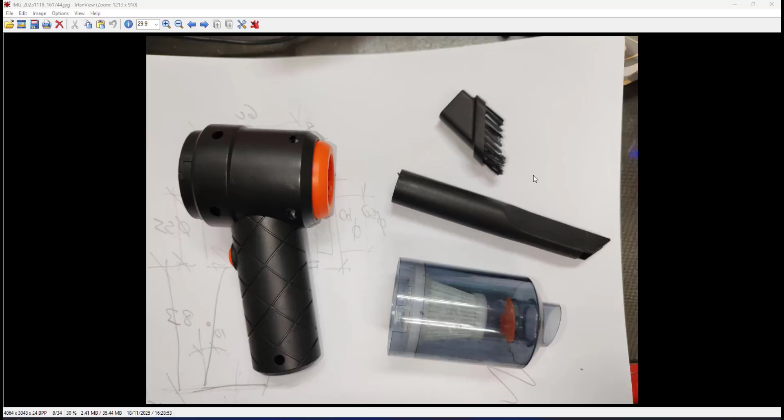This video is about how I will show you how to do this power button here. Actually, I don't have the close-up snapshot photo of this. We have a power button mounted, if you look at this image, it would be fitted here. So I will show you how we will do this orange power button in Solidworks. I will start part modeling.

A new part modeling, and the unit is set. Here in part modeling, you can also insert a different part in your new part modeling file. So to do the power button, I will insert the main body file. Since my main body file has the rear casing and the front casing, I'll use that main body file.

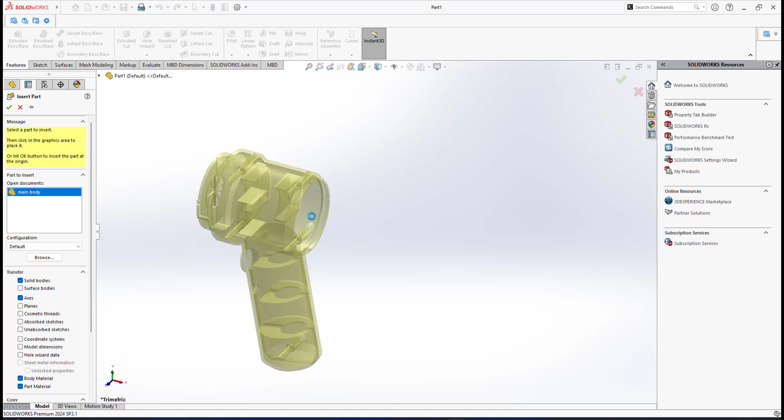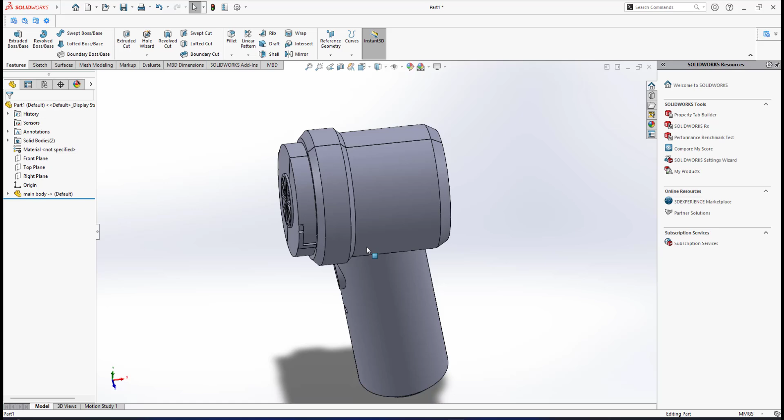I will not click on the screen. I simply click OK here, so it will put it at the screen at the base point, maybe at the origin point. So this is a new part modeling file. It's not affecting the original main body file that I've already created for the front and rear casing.

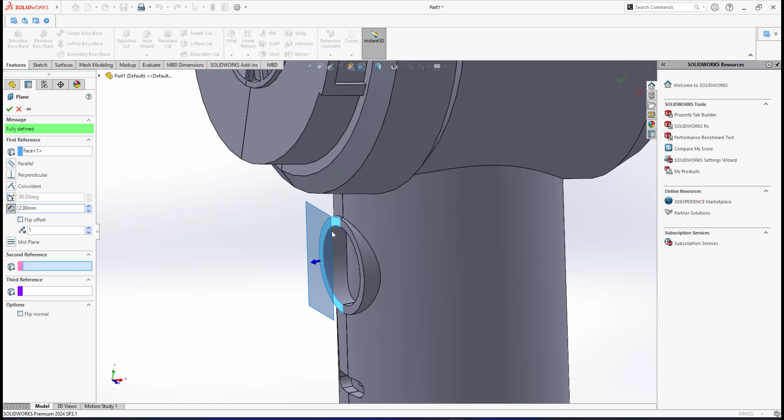To do the power button, there's a lot of ways. One quick way is that I will create a plane here. If you look here, there's a flat plane. I will create a plane at a level of 2mm from here, so it means I have a level for me to create the flat surface.

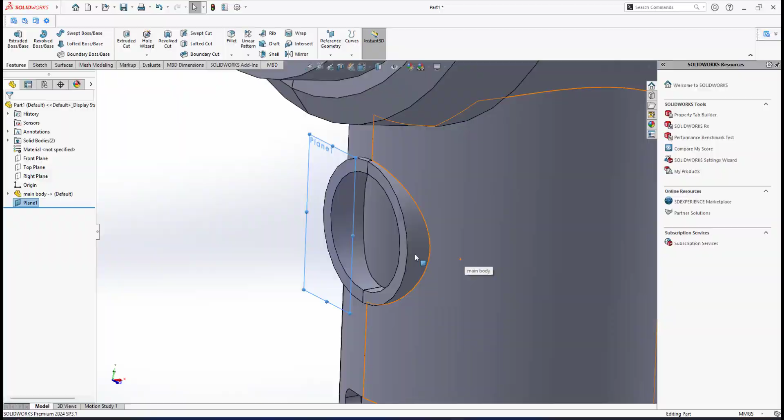Since the power button is a cylindrical shape, here I will create a circle 2mm in. I have a little bit 2mm ahead here as a starting point of the button. So on this plane I will create a sketch.

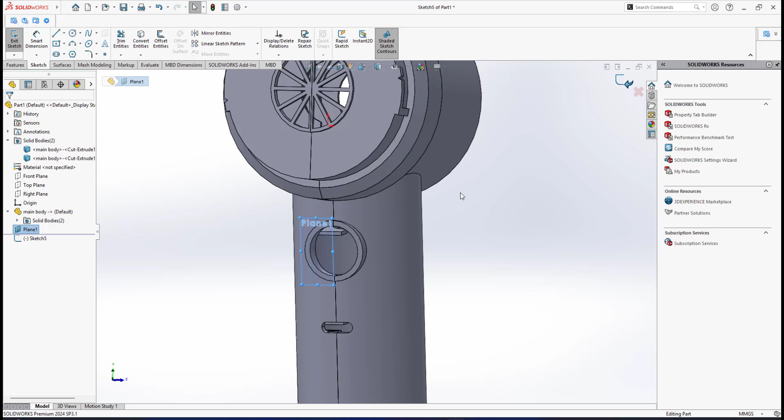What I want to do - since this main body is split into front and rear casing, I will make a half shape of the on-off button. Let me exit the sketch to show you. I need to turn off this front casing because the main body is split into front and rear, so I cannot make a full shape of the button. I will make a half shape of the button, and later, after I've done the half shape, I will do mirror body to make it one full button.

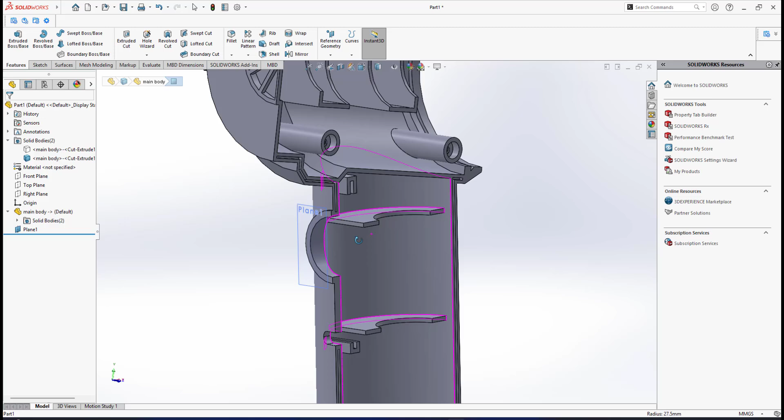Since I have this plane here, I need to work with it, because the button has a shoulder that fits inside - the shoulder shape blends with the curvature of the surface. At this plane I will create a sketch.

I will do a half shape of the button, and the shoulder, since the shoulder is inside, not the size of the button outside the casing. Since the shoulder shape is the same as this diameter, I will select this edge and convert entity to get the outline. Since I want to make a half shape button, I will join this line to make the shape of a half circle.

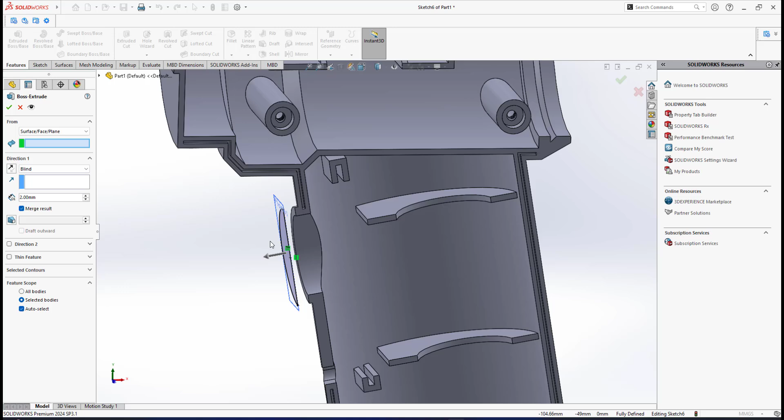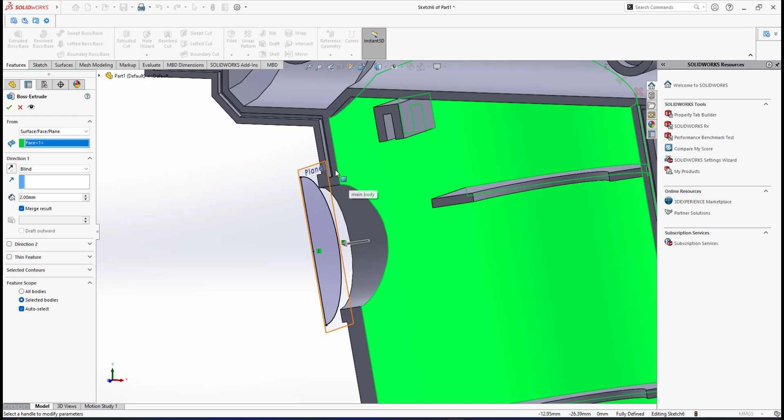This circle - when you do boss extrude, you don't necessarily need to, you can choose from a surface. I mean, I can start at this cylindrical surface here, but the problem is that since this rear casing has an opening here, Solidworks cannot make this half shape circle blend to the inner surface of this rear casing.

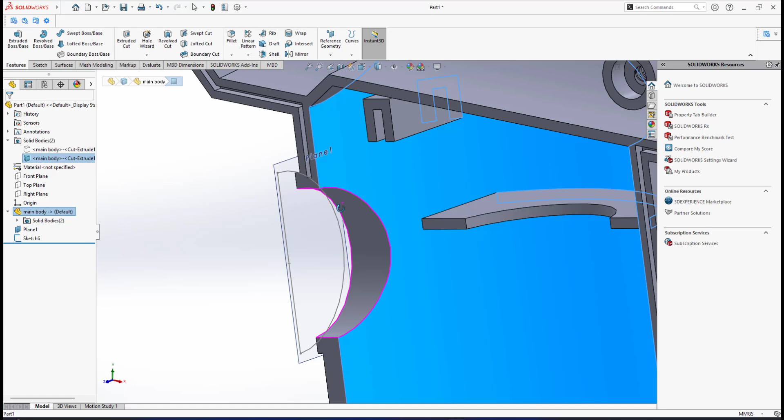So let me cancel the extrude. Before I go for extrude, since the inner surface here has an opening, I need to make this surface without any opening in this half circle area. I don't want to disturb the original rear casing here, so I can duplicate this surface. That duplicated surface I can close the holes here, all the openings, so that I can make the on-off button start the extrude from this inner surface.

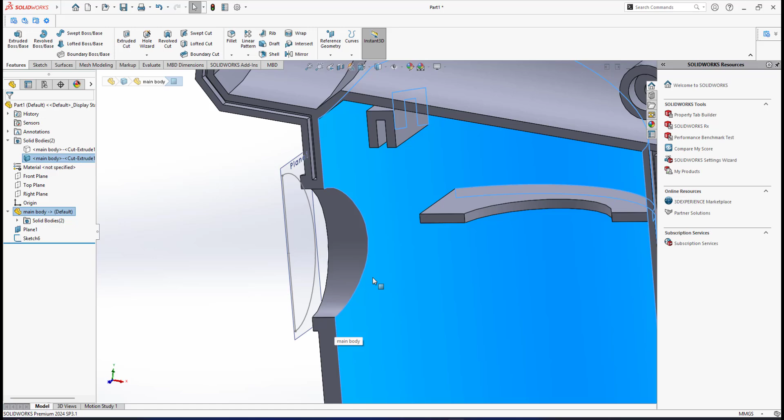To clone the surface, I cannot do what I've typically shown you before, where I use features, move, copy to clone - that is for cloning the whole body. To clone or duplicate the surface, if I select the surface I want to clone, under the surface tab we have offset surface.

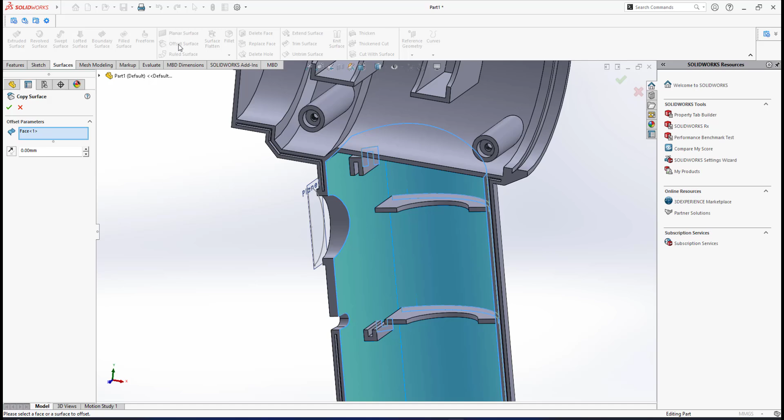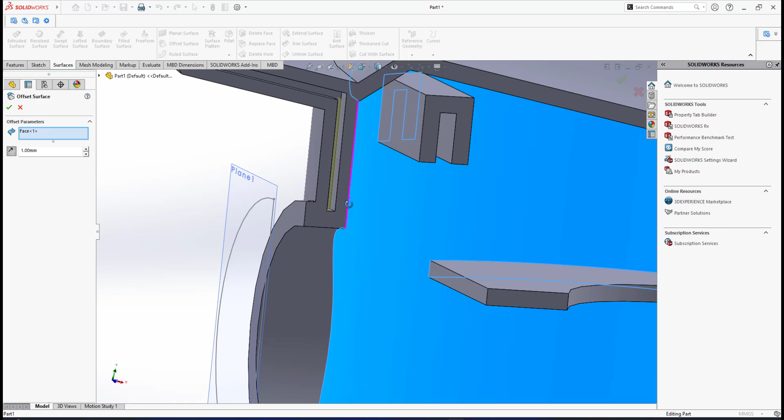Offset surface is meant for any selected surface - for example this one, I select the surface, and if I give any value like 1, it will make an offsetted surface, as shown in the preview - it makes an inner offsetted surface. If I go the other direction, instead of inner it goes outer, but I'll go like this, inner.

Since I only want to clone the surface, I don't want to make an offsetted version, so I put the distance of offset as 0, meaning it clones the surface at the same position. I click OK, and now under the surface body we have one offsetted surface. It's not actually the rear casing, so we still maintain the originality of this rear casing. The only thing is this is a duplicated surface.

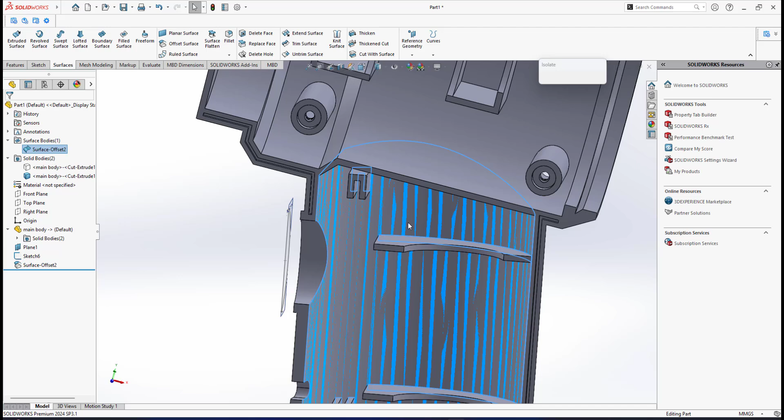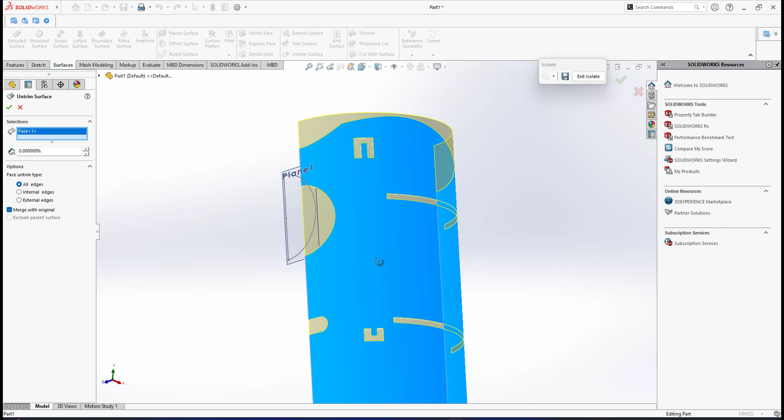If I isolate it, now we have a single surface here. This surface, I need to close all the openings that I have here. To do that, under surface we have Untrim Surface. Untrim Surface means if I select the single surface, Solidworks can automatically untrim any opening of that surface, filling in all the holes and gaps. I just go for default and click OK. Now I have the untrimmed surface.

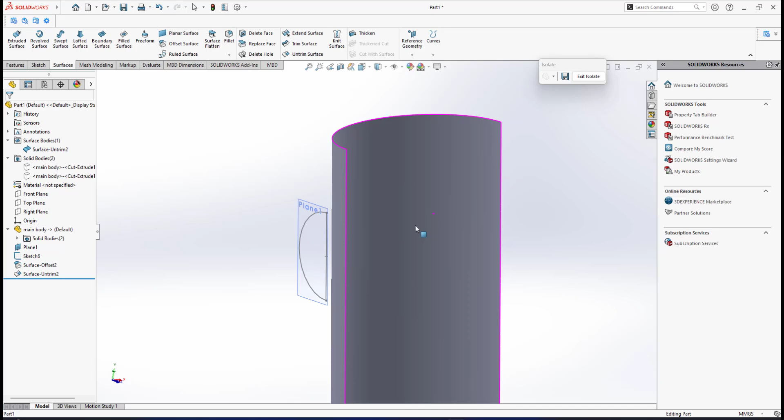This surface is a temporary surface for me to create the half shape of this on-off button. Since I have this clone surface here, under features I will go to boss extrude. I will select this sketch. Instead of using sketch plane, I can go from surface, meaning I start from the surface. As you can see in the preview, it goes to this direction.

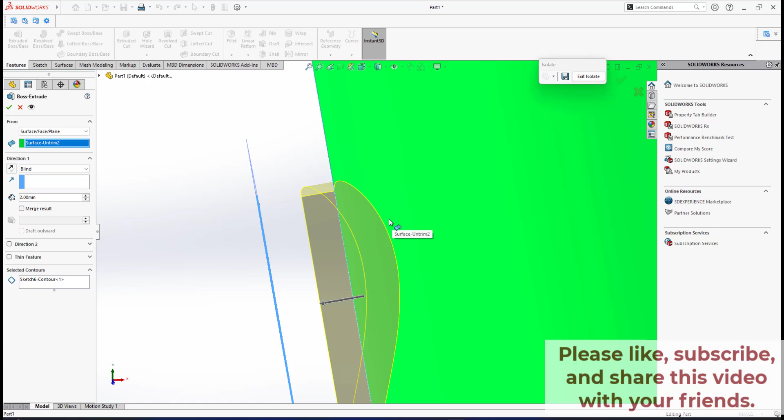Since I want to make a shoulder inside the surface, I want to go for this direction, and the shoulder thickness is only 2. I must make sure this is not merged, so uncheck the merge to make it a separate body. I click OK, and now I have the shoulder of the on-off button.

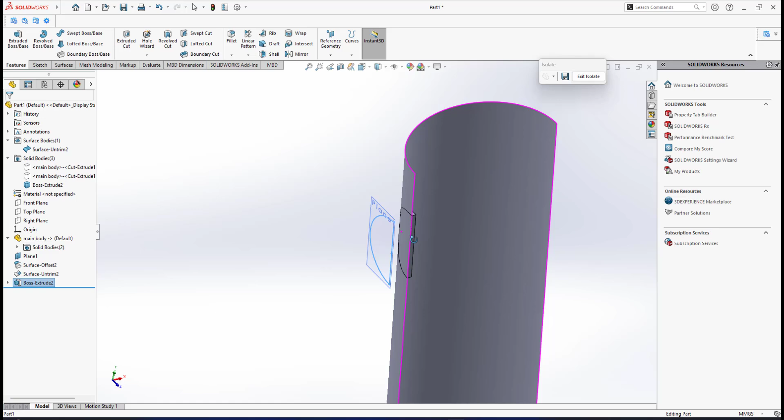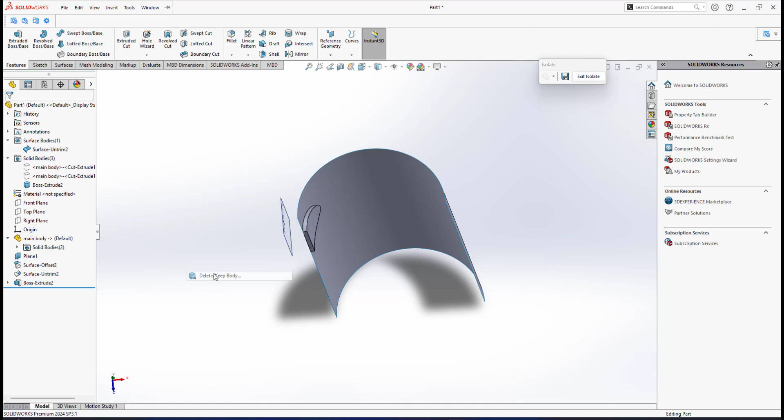As you can see the result, the shape blends with the curvature of this cylindrical surface. Now I exit, and I can delete this body since this single surface is considered as a surface body. Features, delete body - so I delete this body. Now I have the shape of half of the on-off button.

Now, instead of mirroring now, I will mirror the whole thing after I've completed all the shape of this half on-off button. Let me exit isolate. Now I have the shoulder of the button. Now, at this same sketch plane, I will do a sketch.

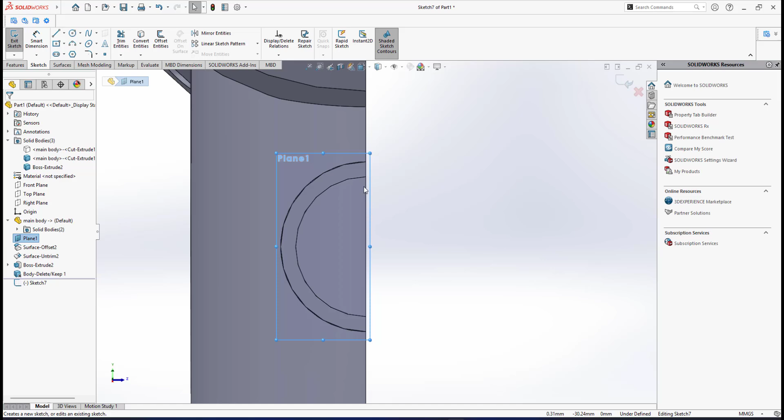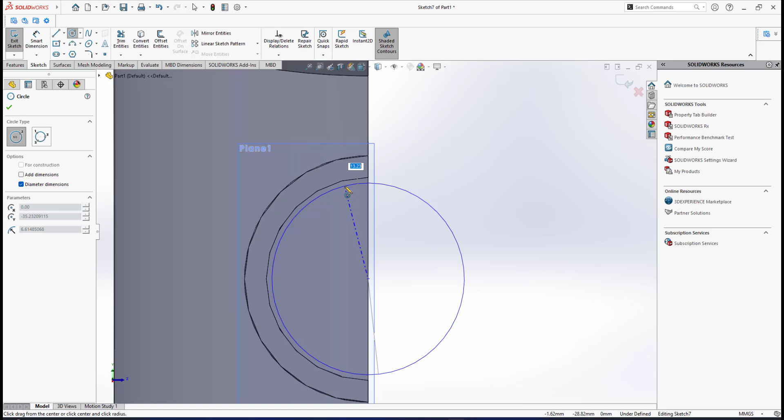Now I will make the size of the on-off button. So here I will create the circle, with a middle point there. The circle will not be this same radius here - I need something like a gap or tolerance, because when we make a button we need some clearance. If I evaluate and measure the diameter of this inner circle, it is 14.

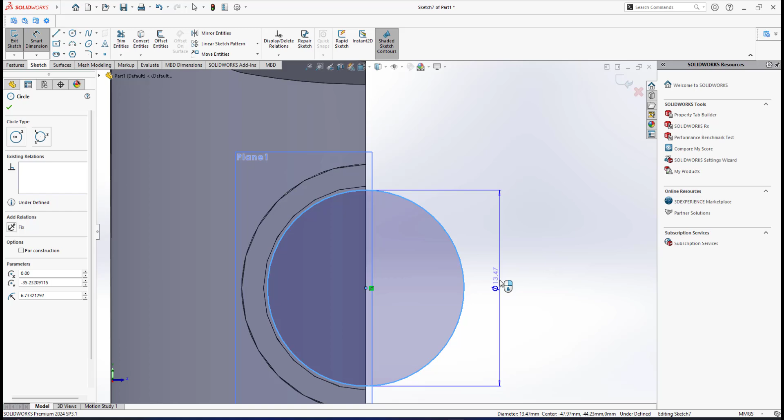So for this one I will give a tolerance - since the diameter is 14, I will go for 13.8. At least we have some clearance, since this button will not be tightly fit into this. So this will be 13.8.

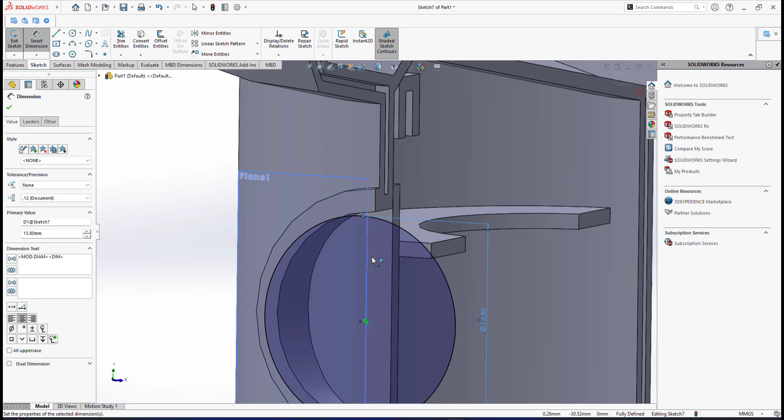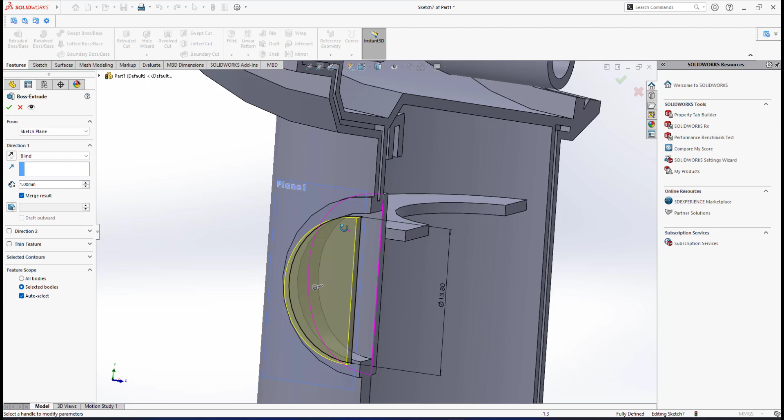So what I will do here - I need to make it half, so make sure it's at the quadrant. Draw a line, then I will trim it. So this is a half shape, and then I go extrude and stop to this surface, making sure it merges.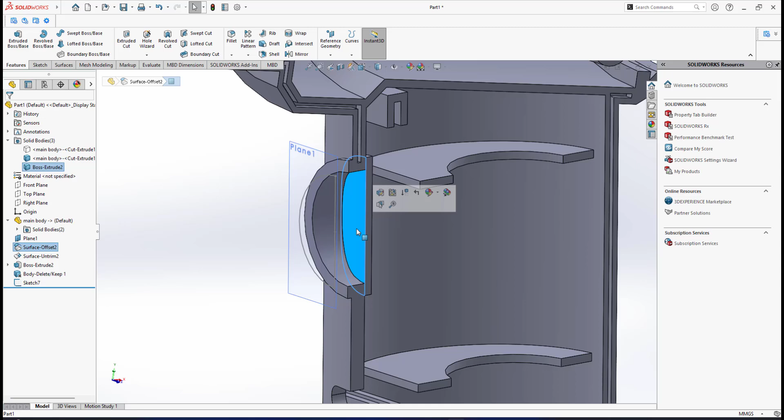Be careful about this - I don't want it to merge with the rear casing, so before I do boss extrude I need to isolate only this thing. Let me select this body and isolate it. Now I will do extrude, select this sketch, and go up to surface so it will stop at that surface, then make sure merge result is checked, and now this button is merged.

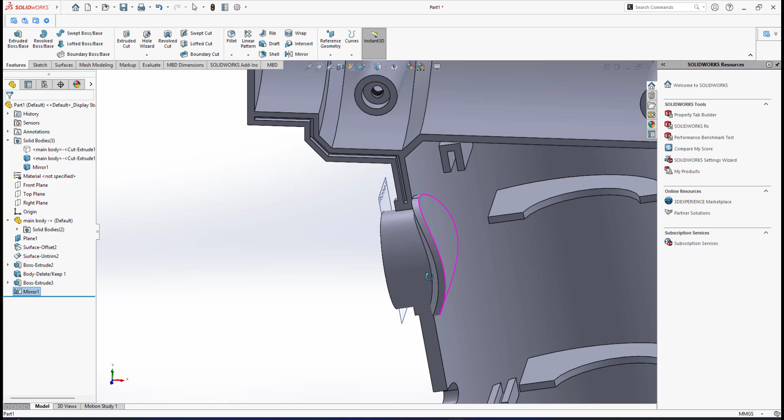Now I will do mirror, with the plane being this flat plane. I'm not using feature mirror because it's the whole body, so I will select the whole body, make sure merge solid is on, then click OK. Now I have this on-off button. If I exit isolate, as you can see now the button nicely fits onto this rear casing, and same goes for the front casing.

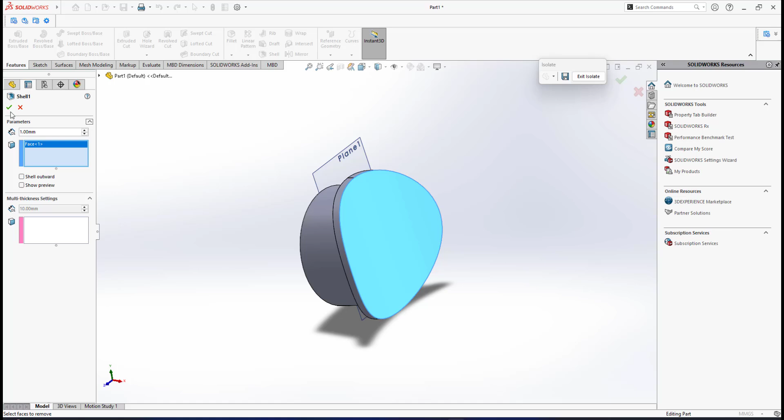Let me isolate this on-off button here. Since the button needs to be shelled, I will shell it for 1 millimeter - I select this surface, then click OK. Now we have this thing. If I go for section view, we have 1 millimeter thickness of this.

Alright, let me save this. Let me save as on off button.

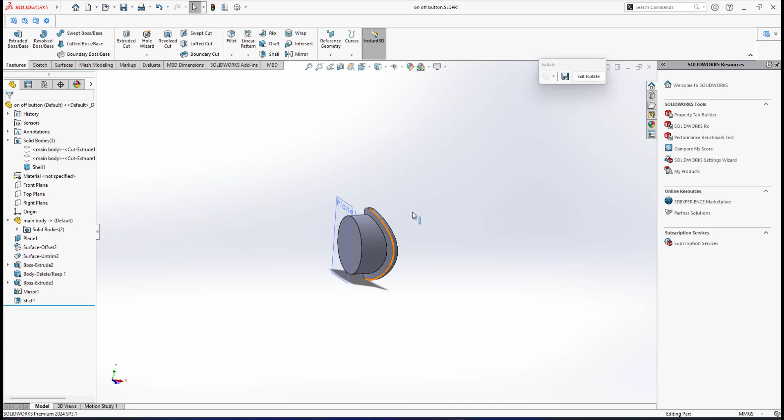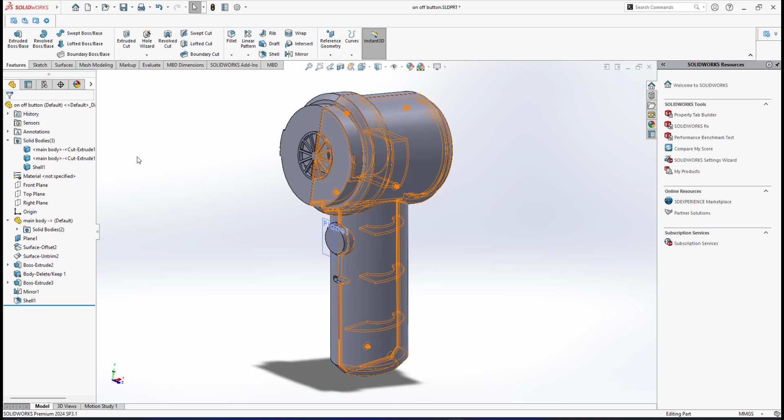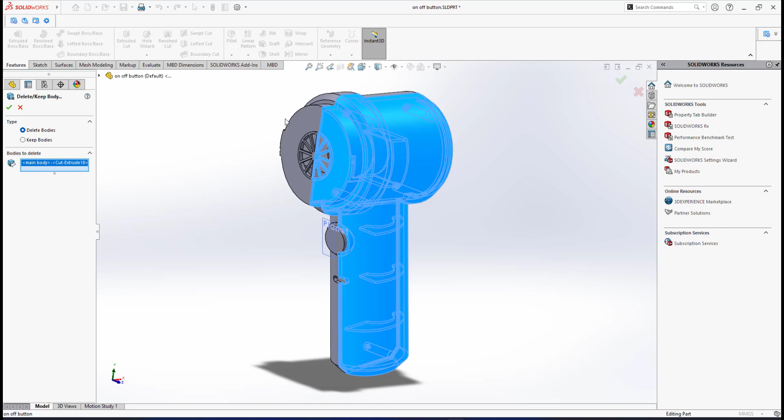Right, on off button. Alright, I need to show you, since this is on off button, since from the beginning I created this as a new part modeling file which is on off button, this front and rear casing I need to delete, because the on off button has 3 solid bodies. I don't want the rear casing and the front casing, so I need to delete this body. So hold on, it's not showing, okay, under insert features I can delete body. I select the front and rear casing.

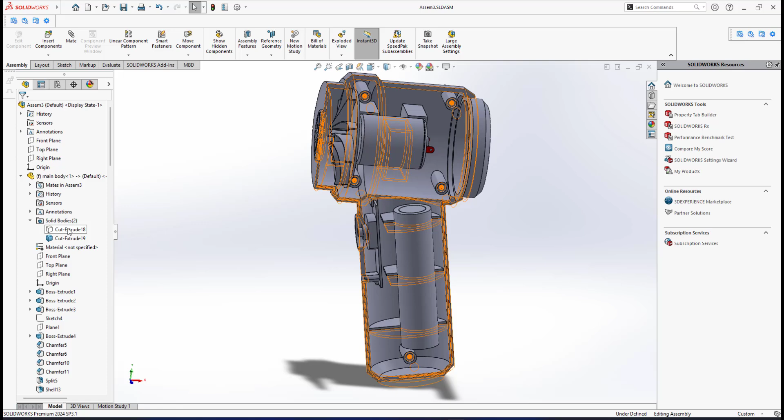Now I only have 1 solid body, then I save my file again, so I have the on off button. Alright, if I go back to the assembly mode, in assembly mode I need to insert the button, because I need to know where is the position of the button. So here insert component, I have the on off button, so I put the on off button at this location. Right, so now I will do mate, the cylindrical body here mesh with this one, it goes for concentric. Right, then I click OK.

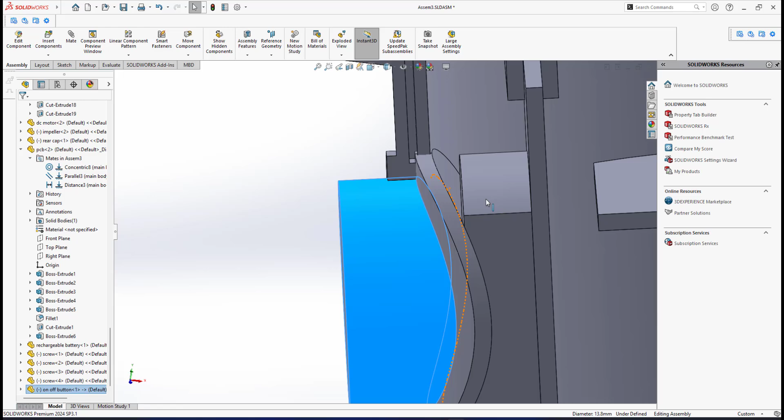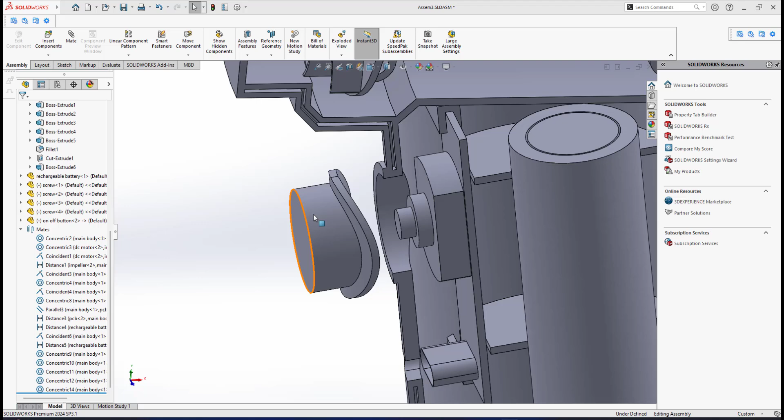But now I need to position this. If I drag it like this, I need to position the button. It's kind of like we don't have any interference with the internal component here. We have a PCB, we have a tactile switch on this PCB, and I don't want the shoulder to touch the inner surface of the rear casing. Alright, let me drag like this. Okay, when you drag this power button, this on off button, sometimes you will accidentally rotate this power button like this, so it means it's not in line.

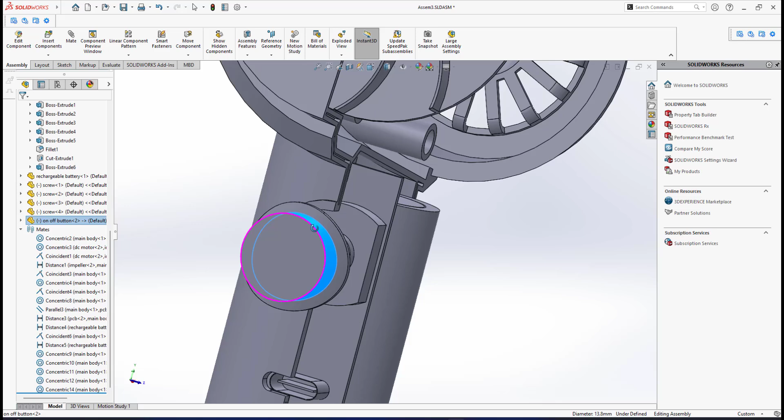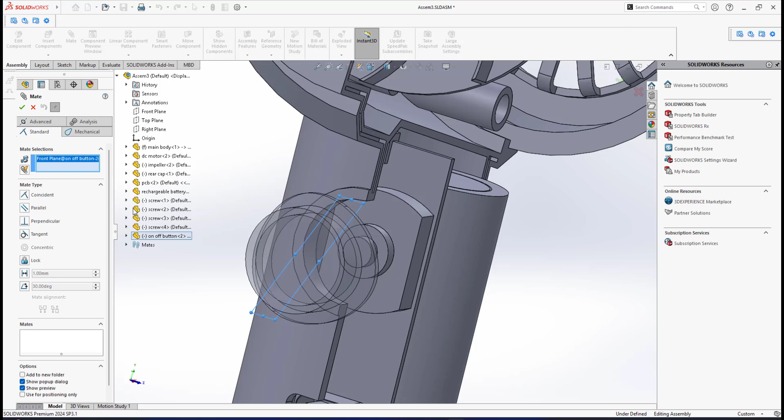So I need to do another mate setting. So mate setting here, if I click on the list on the screen here, let me close this one. So the on off button, I will go for, this is a front plane on the on off button, and it must match with the main body front plane. As you can see, if I zoom out, the front plane like this, so it will put into coincidence. So then if I click OK, now the on off button cannot rotate.

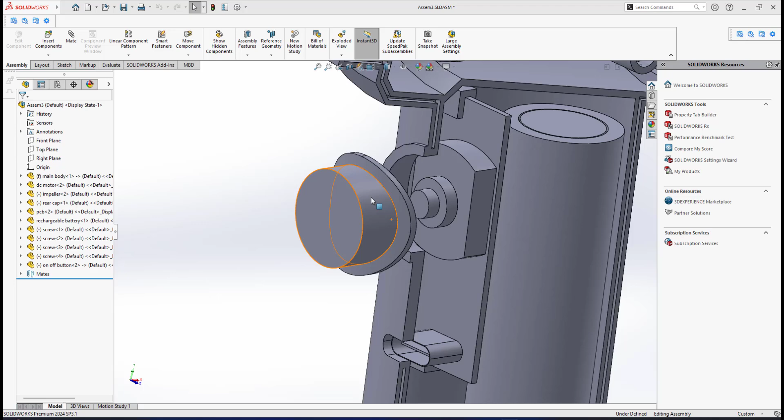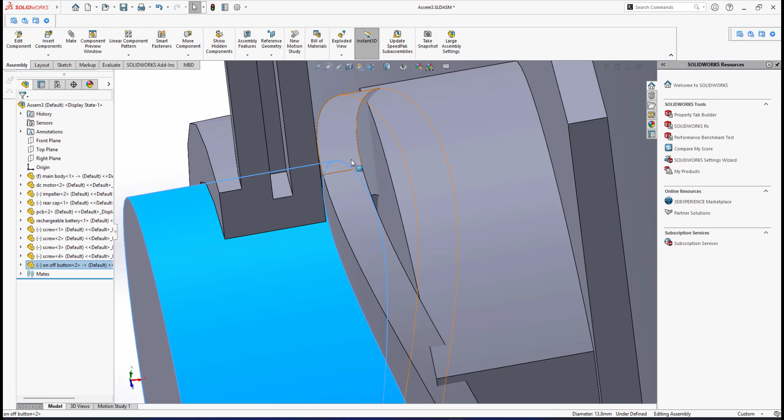Okay, the next setting is about positioning this on off button. As you can see, if I drag it like this, it looks like this, since this on off button has a shoulder, it's like this shoulder doesn't have enough space. It's like we have interference with this tactile switch. Okay, to fix that, let me drag this on off button here. I need to give some more space here.

Okay, since earlier I have done mate setting for the position of this PCB up until this surface. If I click at this PCB, I click open the list, I have a mate setting, so the distance that I've already done is 3. Let me go for 4, so it will give some more space here. Alright, let me save again.

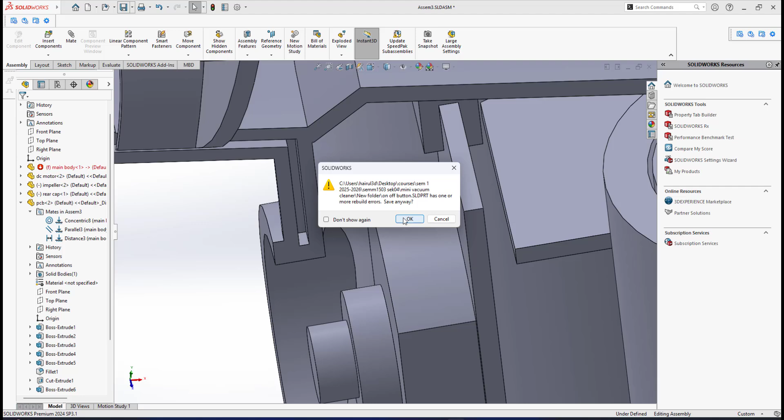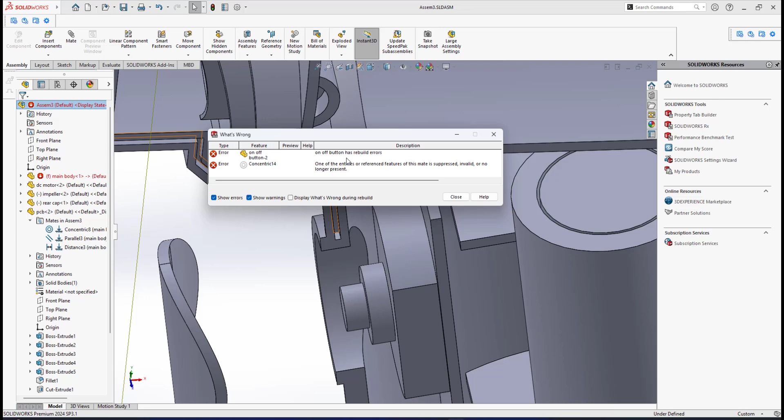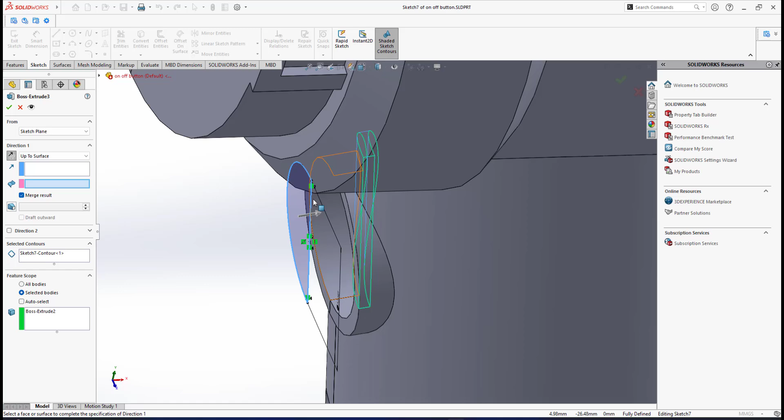Okay, sometimes this happens. Never mind. It's not other thing, it becomes, when I click at it, it goes. If I right click at it, it will explain what's the error here. Like this one, if I hold on, if I ask for what's wrong, it says the on off button has a rebuild error. Let me close. So it means, as you can see, if I open back the on off button file, it's kind of reading like this, since I already deleted the main body, the front and rear casing. So it's about this thing. It's about, you cannot read, actually you have to extrude at the surface and merge result, and now everything is good. I save it again, then let me close this one and update. Sometimes it happens like this. Okay, that's the only way to solve it.

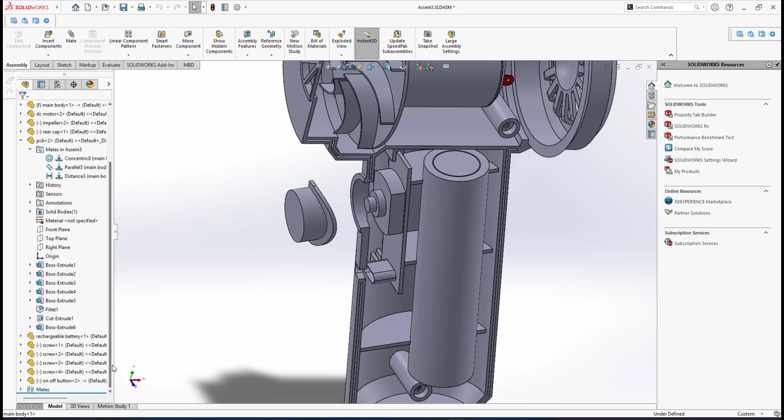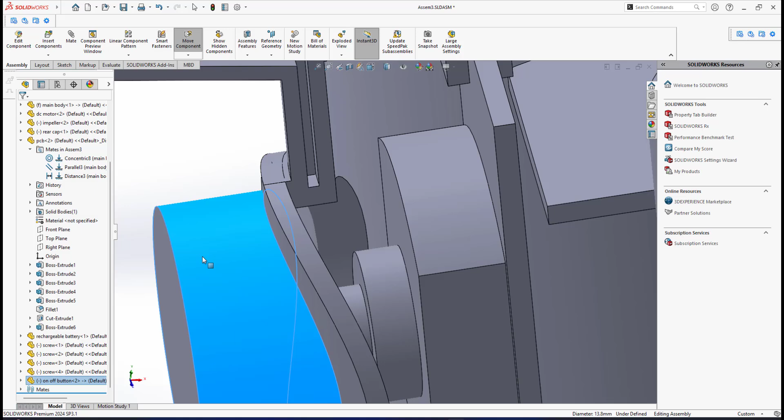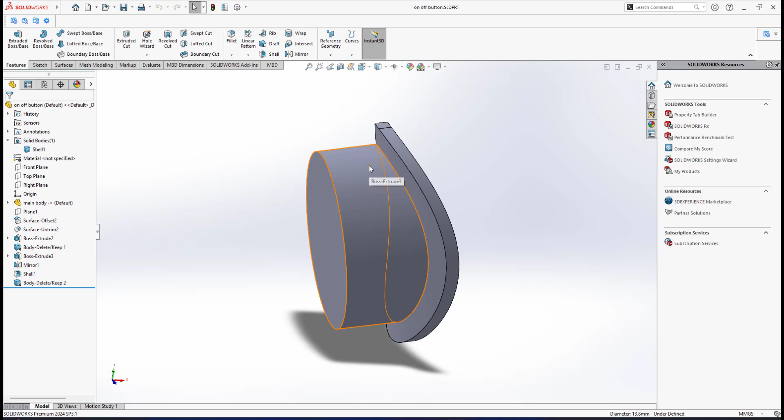It's not reading right. Okay, this on off button here, I already gave space, 4mm value from this surface to this surface, so it means I have some space here for me to position, but I cannot just simply do it like this. Even with mate setting, I don't have a reference. If I go to mate setting, if I select this point and mesh, I don't have the point, since I made this cylinder a little bit smaller than this edge, because I give a gap of 0.1. Okay, the way to do it, I open back this part modeling file of the on off button. If I go back to where I made this before, let me show you.

This one I already boss extruded. Before that, what I mean is this one where I have the main body, before I delete these two casings here.

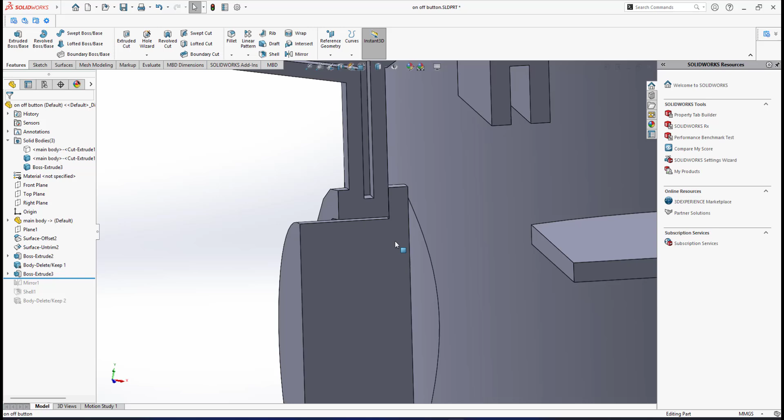Let me go for section, not section view, just off the front casing. I off the front casing because I need to put a reference point. This is the on-off button, so this will be my reference point.

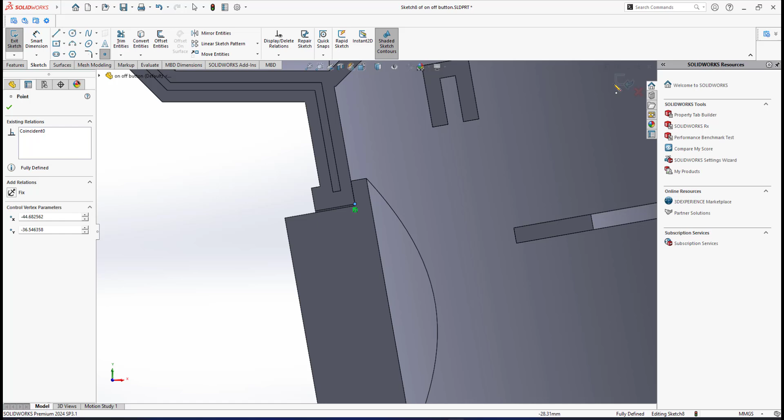At this sketch plane, I will create a sketch, then create one point there as a reference, then exit it and go back to this position. Okay, I have a point there, a reference point.

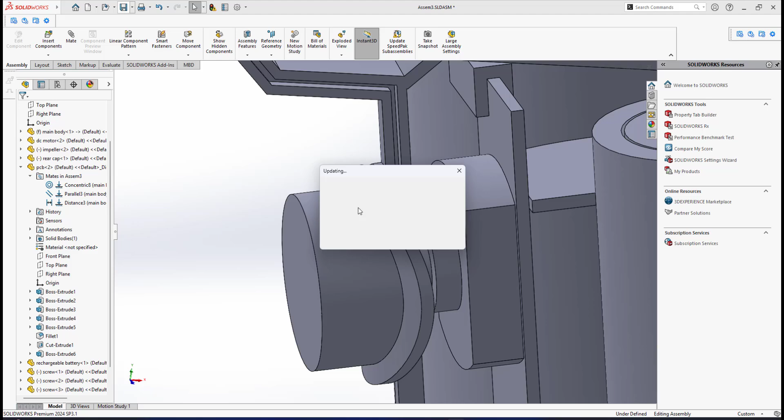I save my file again, and if I go back to the assembly file and click yes, as you see here, if you look closely, I have a point there, so I can use this point to be coincident with this point for the next mate setting for this on-off button.

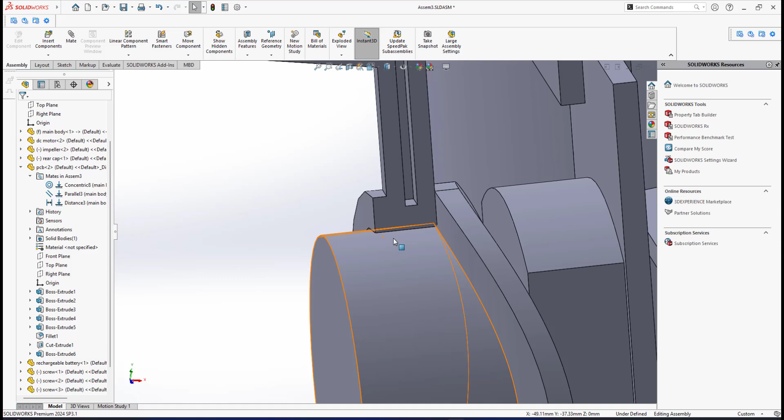So I will do another mate, carefully select this point and this corner point, so automatically it goes for coincident, then I click OK. Now my power button nicely fitted into this casing. Let me save again.

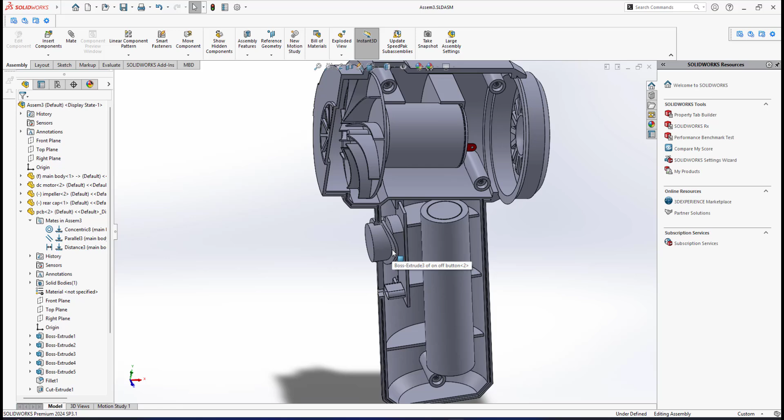Sometimes it happens, I'm not sure whether we have error, so the only way is to open back the on-off button. Let me go to the section view again.

Now I don't have any interference, as you can see here inside, so everything is good. Since I'm in the front casing, I need to show you this.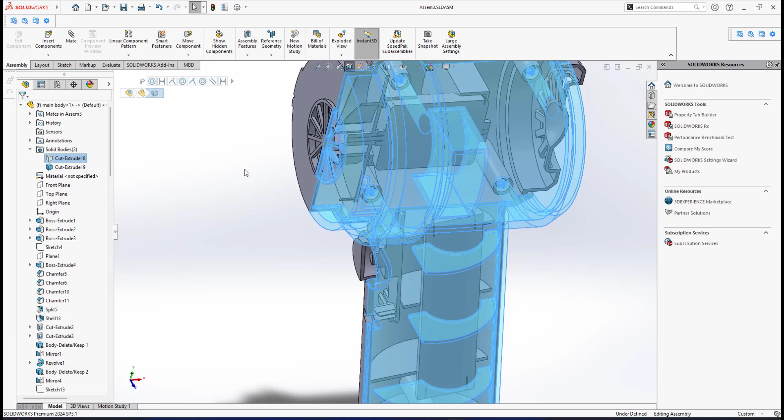Since I'm in section view, this is a front casing. If I go for section view on this plane, up until where I have the position of the button, just to check whether there is any interference. I think everything is good.

We don't have any clearance issue here, so it means when we press the on-off button it will touch this tactile switch, so it has some space there. Let me save my file again.

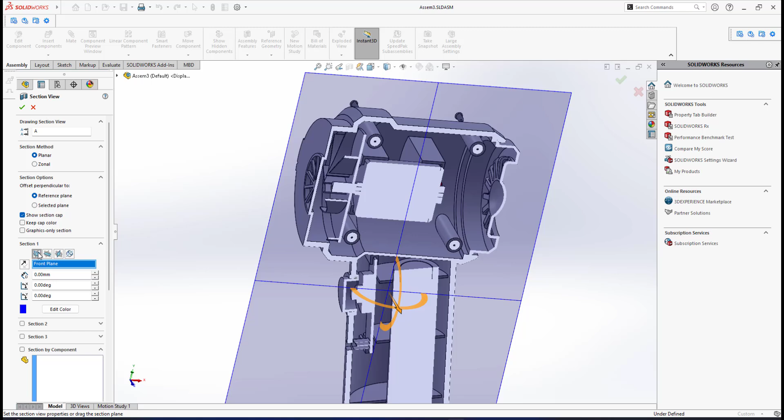Another thing to mention, let me go for section view, not this one, this section view. This on-off button here, since when we pressing it's kind of like not touching, actually I need to put extra features here inside the surface of this on-off button because it's not touching the switch.

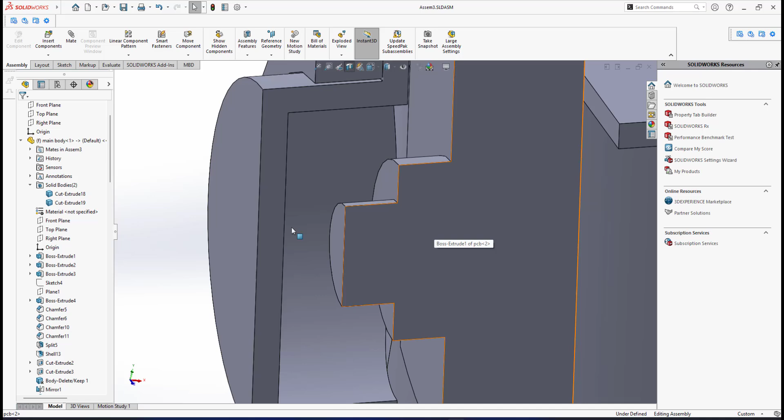The tactile switch of this PCB has kind of like a spring behavior, it's a switch, and when we click it will click, then click again it will turn off. But it's not touching the surface, so I need to see what is the measure from this to here.

So it stated the black color here, the distance is 2.32, so it means I need to add extra features inside this surface of the on-off button. I need to create a circle and extrude it about 2.32 millimeters.

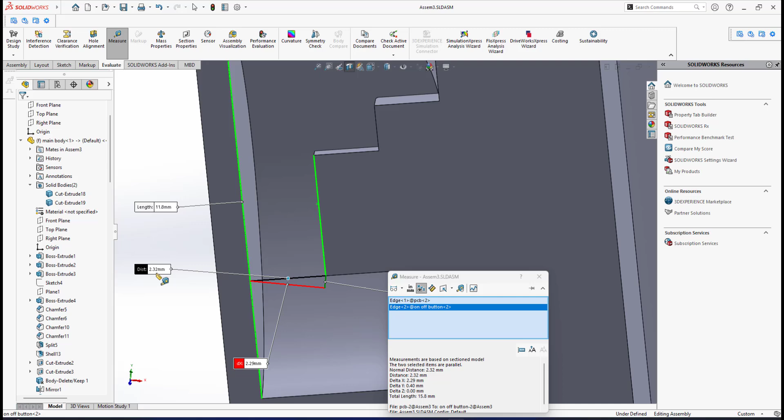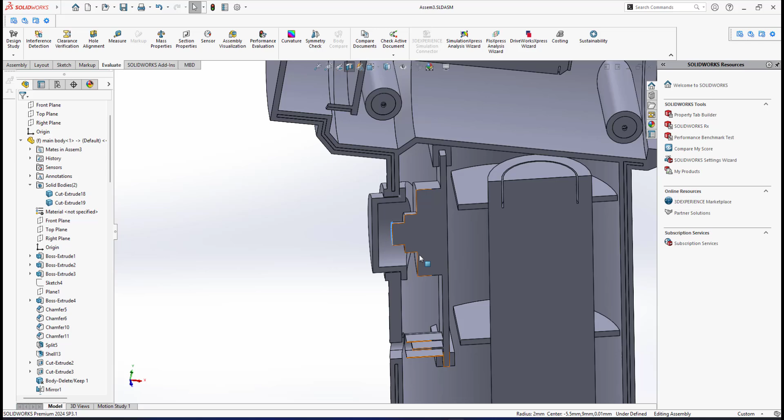So about the size, let me check, if I go for the size of the inside button there, it will be diameter 4 or maybe bigger. So it means I will open this on-off button file again.

What it means is I will create this, making sure it is at that center point, so I will go for diameter 4, then what is the distance? I forgot the distance just now, it's stated...

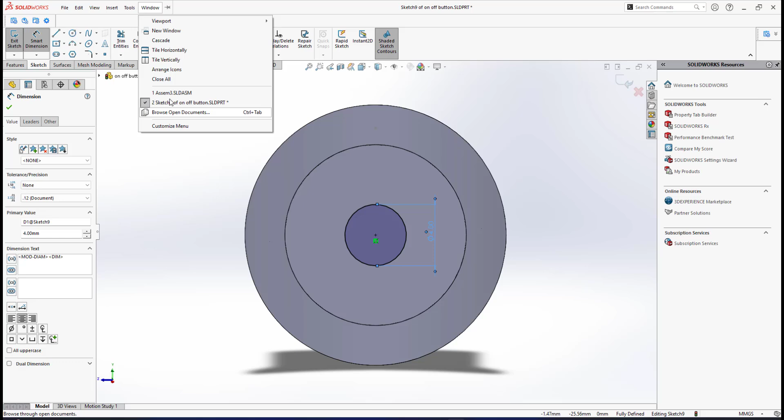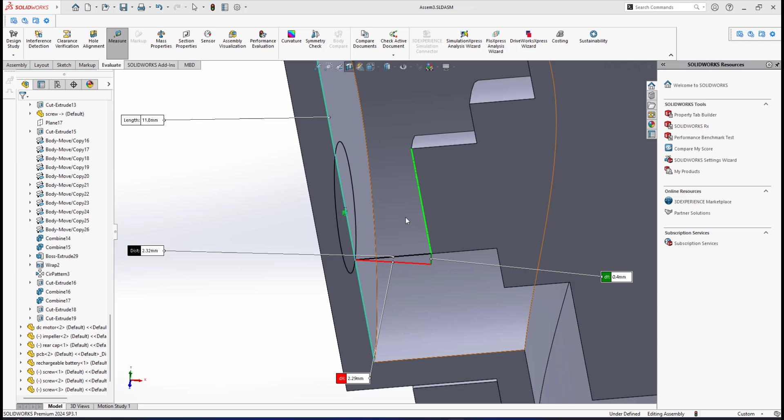The distance from this edge to this edge is the normal distance, it's not the red color, the normal distance is already stated here as 2.32, so I will extrude 2.32 for this one.

So features, extrude, not up to surface, using blind, 2.32 millimeters, make sure merge is checked. So this will be my extra feature that I add inside here, and I save my file again.

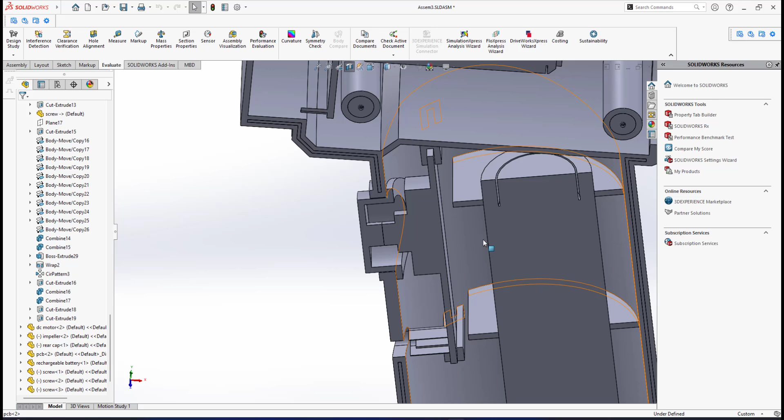If I go back to assembly and click yes, now it's touching. So when we press the button, it will press the tactile switch to turn on or off this mini vacuum cleaner. Let me turn off section view.

So this will be the on-off button that I need to show. Maybe I can do some fillet radius to give a better representation of this button.

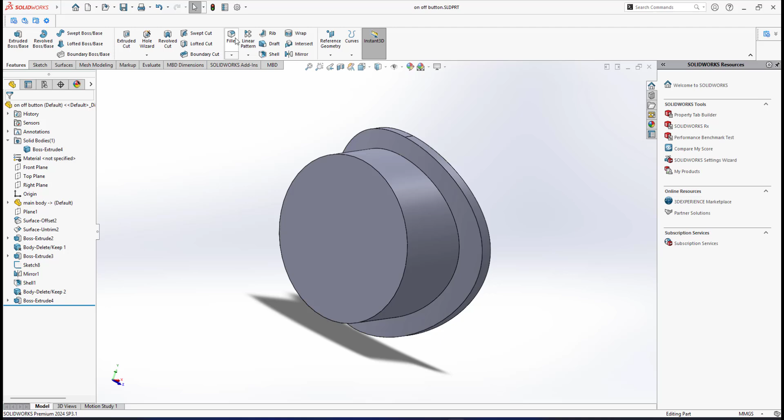So I go for fillet about 1 millimeter. 1 millimeter is good, then I save my file.

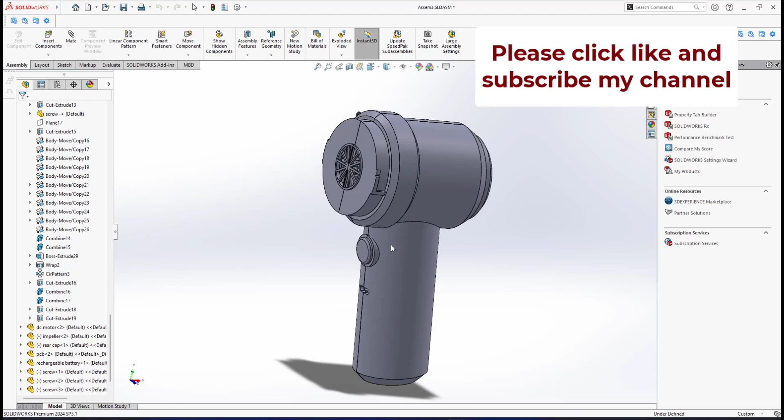So that's how it looks like for the on-off button. Alright, I think I'll end this video here.

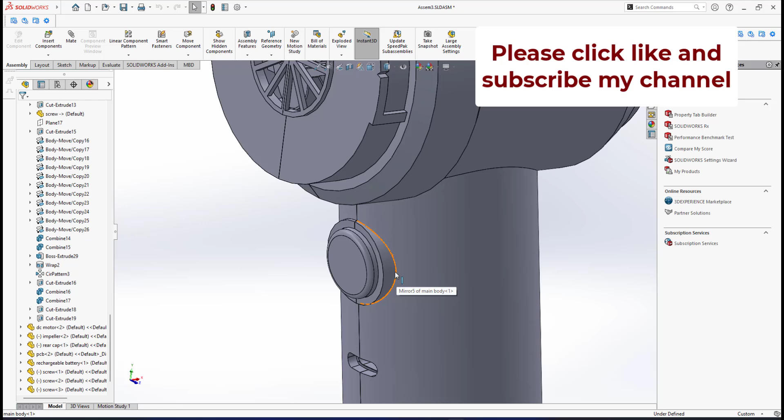This video is only to show you how I did the on-off button for my mini vacuum cleaner, but yours may be different. At least when you see this video, you get some basic ideas on how to do your on-off button.